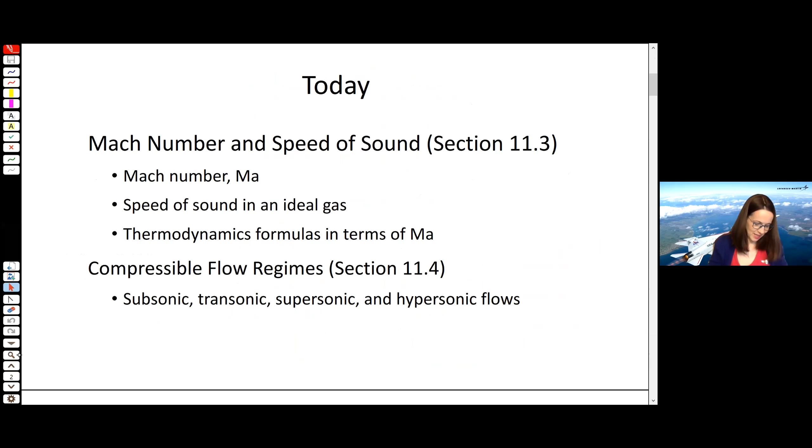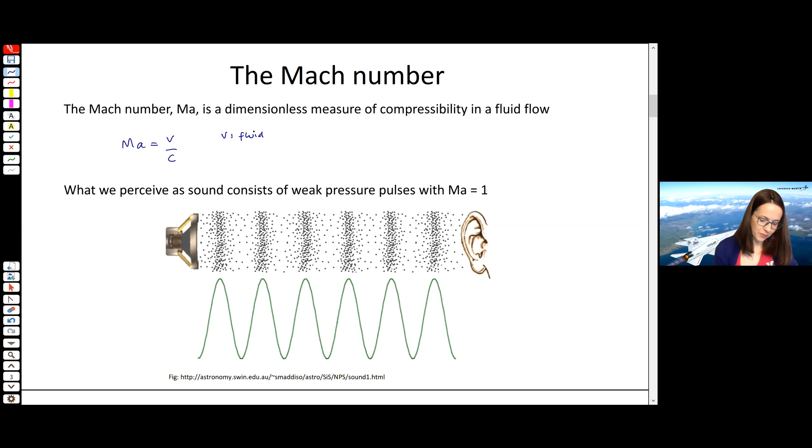All right, so the Mach number, I'm sure you've heard of it. It's sort of one of the fluid dynamics concepts that makes it out into popular culture. Mach number is simply defined as the ratio of the speed of the flow of a fluid over the speed of sound in that same fluid. We're going to be deriving an expression for the speed of sound in an ideal gas today.

And there's a rule of thumb, like we have these different rules of thumb for Reynolds number and when a flow is turbulent. We have a rule of thumb for when a flow can be considered compressible or incompressible. So it turns out that if your Mach number is less than about 0.3, you can consider the flow to be incompressible. So let me write that with a wiggly equals here. And then if your Mach number goes above 0.3, you have to start worrying about compressibility effects.

So when we're thinking about this, if we think about phenomena like sonic booms, hypersonic versus subsonic flow, it all has to do with sound waves in air, right? So what we perceive as sound is just these weak pressure pulses as depicted in the figure here. You can see that they're longitudinal waves, right?

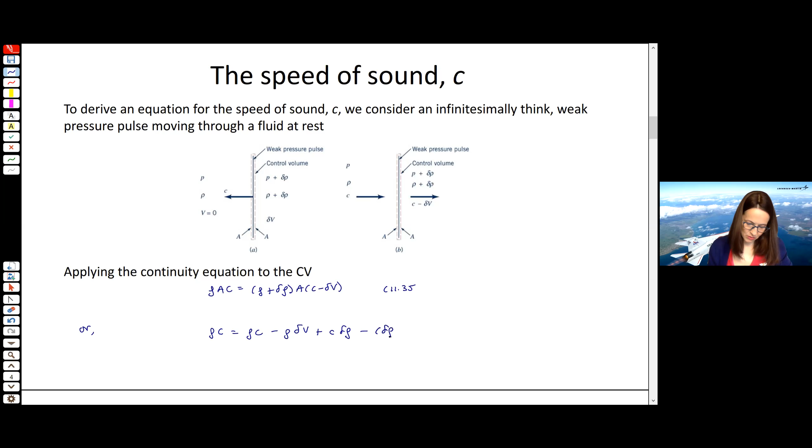So applying the continuity equation, we have rho A c on the left equals rho plus delta rho, A, c minus delta V on the right. This is equation 11.35 in the textbook. Or rearranging this, we've got rho c equals rho c minus rho delta V plus c delta rho minus delta rho delta V.

And you can probably guess where this is going, right? We've got delta times delta, this higher order term here, and we are indeed going to say that it's negligible in magnitude compared to the other terms. All right, and we do that, and we've got now rho delta V equals c delta rho.

All right. My PDF annotator just quit on me again. I really want to teach this class today. I am going to try this one more time and cross my fingers, although I'm not hopeful. Just give me one moment to try this again. And if it doesn't work for us, then I will have to record this class and upload it, but I hope it doesn't come to that. If it does come to that, bear with me because I want to show you a video about sonic boom before we go.

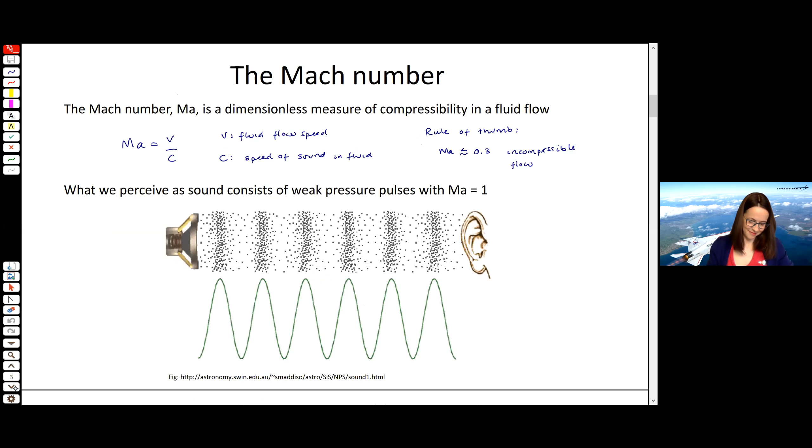Come on, annotator, I know you can do it. You got this. Okay.

So we neglect the higher order term. We end up with rho dV equals C d rho. This is equation 11.37. We've applied conservation of mass. Now let's apply conservation of linear momentum.

We get minus C rho CA plus (C minus dV) times (rho plus d rho) times (C minus dV) A. So those terms I just wrote down are the flux of momentum through the control surface. And now on the right, we've got the sum of the forces acting on the control surface.

We've got the pressure force acting on the left, and we're subtracting from it now the pressure force acting on the right of the control surface. All right, so we're neglecting friction forces in that expression, right? As you can see, we only wrote down pressure forces on the right-hand side.

If we now neglect those higher order terms, we end up with minus C rho CA plus (C minus delta V) rho AC equals minus delta P A. Or rearranging, we've got rho delta V equals delta P over C. This is equation 11.39, and here we're combining 35 and 38.

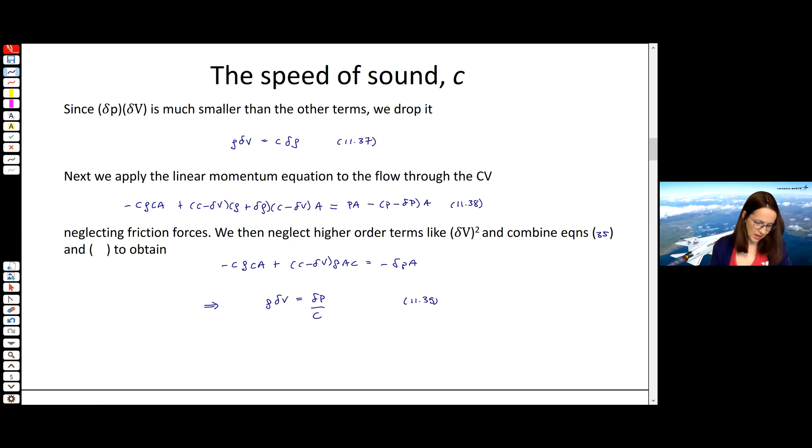All right, and then from 37 and 39, we get C squared is delta P over delta rho, or rearranging, we have our expression for the speed of sound: the square root of delta P over delta rho. This is 11.40.

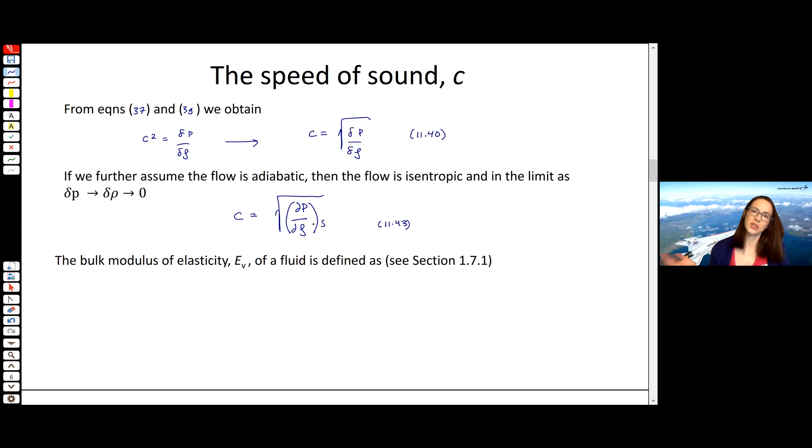If we now assume that the flow is adiabatic, there's no heat transfer in. Since we're already talking about a frictionless flow of an ideal gas, the flow is isentropic. And then in the limit, as delta P, delta rho go to 0, we get the following expression. Right, so what's different here is that the deltas change to partial derivatives. And the subscript S here means that the differentiation is occurring with the entropy being held constant.

All right, now if you remember the bulk modulus from chapter 1, it's a measure of compressibility in any fluid. Doesn't matter if it's a gas or a liquid. And it's defined in the following way. It's dP over d rho over rho, or rewriting that, it's rho times partial P over partial rho with constant entropy. All right, so in general, we have the following expression, if we use 43 and 44.

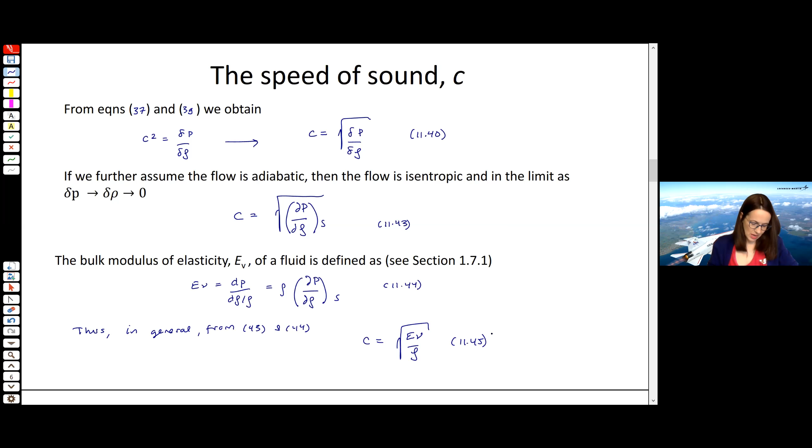And the physical reason behind that is that the higher the temperature, the more the particles making up the fluid are bouncing around and colliding with each other. And so any signal is passed through the fluid faster. But it's really interesting to note, maybe a little counterintuitively, the speed of sound through water is much higher than the speed of sound through air.

It's kind of funny, if you've ever been underwater in a pool and somebody talks, you can hear sounds, but they sound like they're really slowed down. They're actually much faster. And that makes sense from a physics perspective, right? Because water molecules are much more densely packed than air molecules. So if you have a really small intermolecular distance, you can easily collide with molecules next to you and pass along a pressure wave or a pressure signal. When the molecules are farther apart, like they are in a gas, the pressure signal travels slower.

All right, last time we derived the following expression for an isentropic flow of an ideal gas. It was that P is a constant times rho to the K power, where K is the ratio of specific heats, Cp over Cv. And if you remember, for air, K is 1.4. So we can express our partial derivative like this. It's some constant times K.

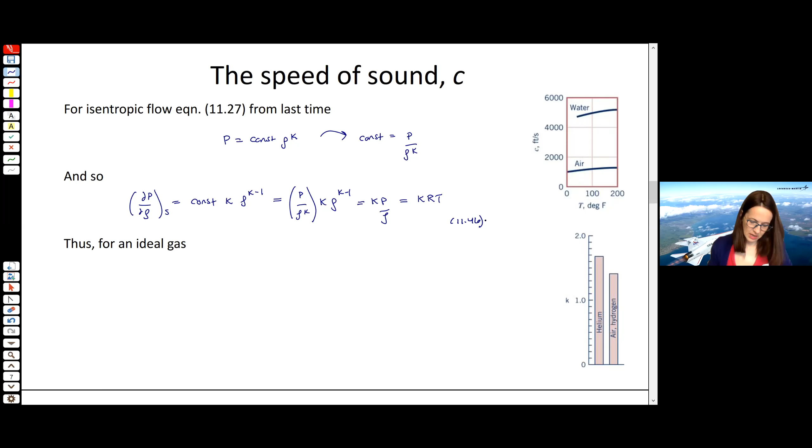Let me actually do one more step of this so it becomes a little clearer, right? So this simplifies to K P over rho, but then by the ideal gas law, this is K RT. Right? So for an ideal gas, the speed of sound is the square root of K RT. This is super important. We're going to box this in red. Equation 11.47. All right.

So another thing to note, if you look at the figure on the bottom right here, this is the value of K, that ratio of specific heats for a couple different ideal gases. So air and hydrogen have approximately the same value of K, but then helium has that higher K value. So that explains the helium balloon effect, right? If you look at the speed of sound in a gas, it increases with increasing K. So helium has a higher K value.

So when you take helium into your lungs, which you shouldn't do, it's dangerous. But when you take helium into your lungs and then speak, that's why it's so hilarious, right? It sounds sped up, and it in fact is. The sound is traveling faster to your ear when helium is the medium it's traveling through rather than air.

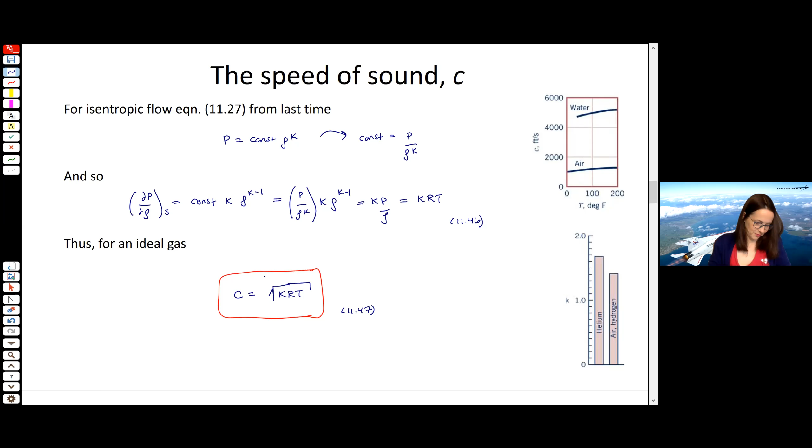All right, we can also rewrite our thermodynamics formulas in terms of the Mach number. So if we take our Mach number and square it, it gives us just V over C squared, right? But we just wrote down an expression for C for an ideal gas. So this becomes V squared over K RT, following the expression we wrote down on the end of the last page. Now, using the ideal gas law, we get rho V squared over K P, just plugging in the ideal gas law there. This is equation 11.48 in your textbook.

We can now take that and substitute this expression into those ratios that we derived last time. If you remember, we derived the ratio of the stagnation to static pressure, temperature, and density, right? Our thermodynamic quantities. And they weren't in terms of the Mach number, they were in terms of velocity and the specific heat, C sub P, right? Well, we can actually replace that term and rewrite those equations using this expression here, and we get the following.

So our ratio of stagnation temperature to static temperature for an isentropic flow of an ideal gas is 1 plus k minus 1 over 2 times the Mach number squared. And this is 11.50. We have a very similar relationship for the ratio of the stagnation to static pressure. And it is 1 plus k minus 1 over 2 times the Mach number squared, but now raised to the k over k minus 1 power. This is equation 11.51 in your textbook.

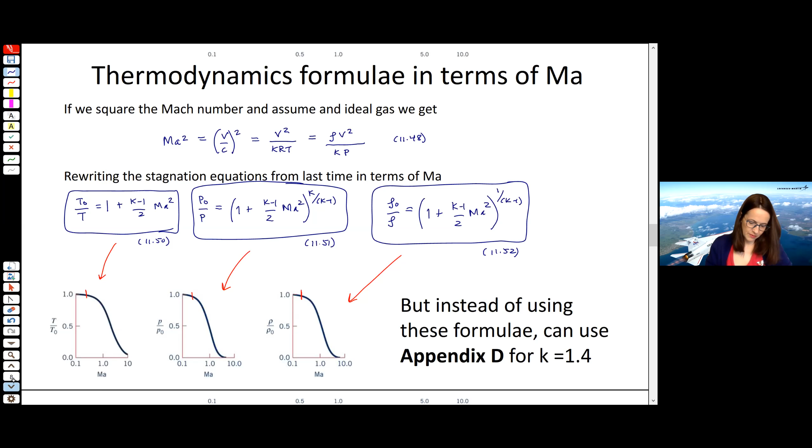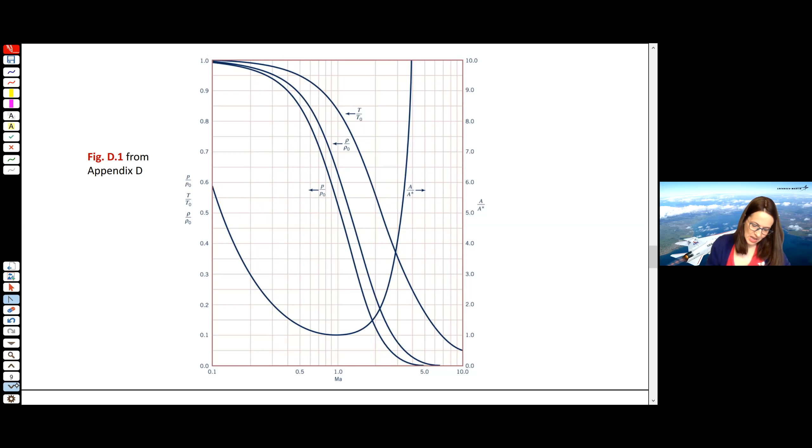So if you're given a Mach number, say it's Mach 1, you just trace it up to the appropriate curve for whatever quantity you're looking for, see where it intersects, and then trace that back to the vertical axis. Okay, so that's how you use that. If you want to be more precise numerically, you might want to use table D1 instead, which is the next item in appendix D. It's got the Mach number in the first column, and then the ratio of static to stagnation temperature, pressure, and density in the next three columns.

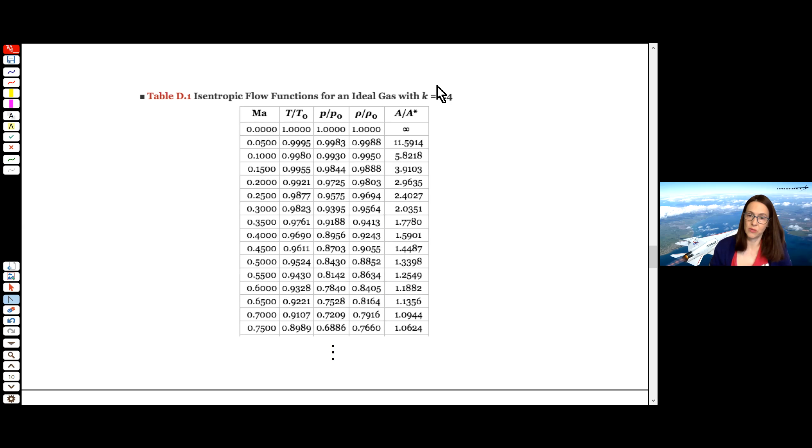The thing here is it's not continuous, right? So if you're given a Mach number that falls somewhere in between these values, you can either not be terribly precise and pick the nearest value, or if you want to be more precise, you can use linear interpolation. Again, keep in mind this is for K equals 1.4, so air, or maybe a problem would say an ideal gas with K equals 1.4, without specifying that it's air.

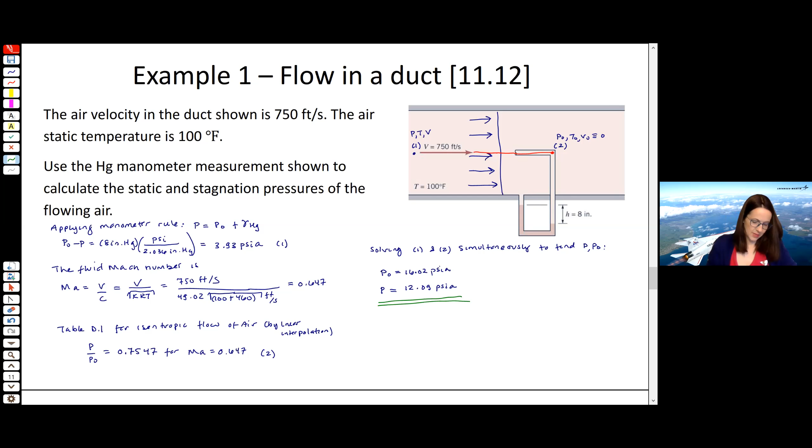So here we see we've got a stagnation pressure inside our pitot tube, and it's higher than our static pressure. And that's exactly what we expect, right? So by the Bernoulli equation, we expect that if the velocity is decreased, brought to zero, we're going to see an increase in the pressure. And those trends hold for compressible flows as well, at least subsonic compressible flows.

But for external flows, we calculate the drag force on an object, F sub D, by using the dynamic pressure times the area times something called a drag coefficient. So basically, if you've got air flowing with speed V, and you've got something with a projected frontal area of A, how much drag force that object experiences depends on its drag coefficient. And the coefficient changes a lot with the shape, right? Whether it's a circular cylinder, a sphere, a cube. In general, the smoother and more aerodynamic an object is, the lower the drag coefficient that it has.

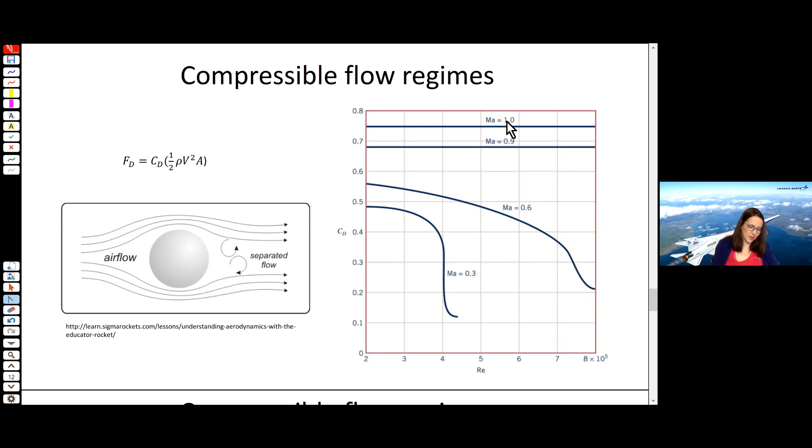All right, last slide here before we hopefully will have time for a movie. If not, you can watch it on your own. Movie about sort of sonic booms that relates to the aircraft, the NASA aircraft, Lockheed Martin aircraft I've got behind me.

All right, so now I want you to imagine that you've got some object and it's traveling from right to left with some speed v. And it's emitting a sound once a second. So let's say a beep, right? And that sound is just moving away from the object in a circular wave with a constant speed. So here, if our object's speed v is 0, the object just sits there. The object is denoted by this red star, this red asterisk. It just sits there, and these sound waves just move away from it in a symmetric way.

Here's this larger diameter wave is the one that was made 3 seconds ago. This next smallest one, right, here's 2 seconds ago.

All right. So annotator just quit on us again. But hopefully you've got the slides open in front of you. Let me try one more time restarting it because this is annoying. I, of course, lost all my annotations I did because I was afraid to hit save because that seemed to be crashing it before. Ooh, it's letting me restore it. How generous. Oh, wonderful. Kept all the annotations. Hallelujah. Okay, here we are. Wonderful. Thanks for bearing with me. Okay, so here, our object, denoted by the red asterisks, is not moving, and these sound waves are moving out. The largest radius one. Oh, I'm not sharing. Sorry about that. Hold on. Screen share. You can do it. Yes. Okay. Everybody see that? Good.

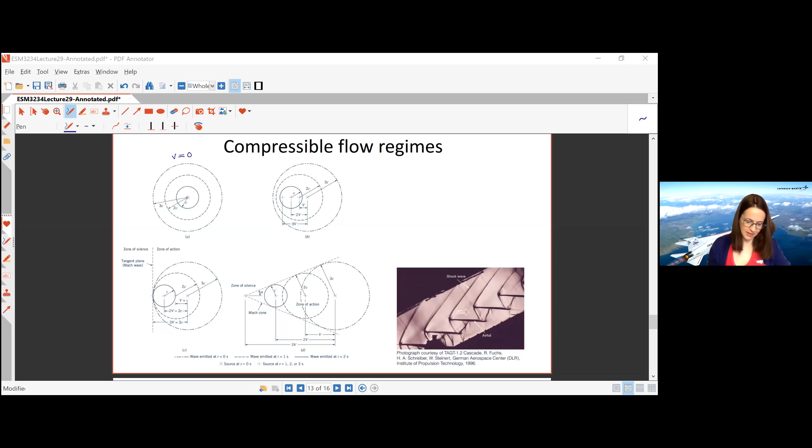Okay, V equals 0. Largest circle here was a sound wave emitted 3 seconds ago. 2 seconds ago was the next largest, and then this one was emitted 1 second ago, right? Here, we've got some non-zero velocity, but it's still lower than the speed of sound in air, okay? Or if you're imagining the analogy of ripples on the surface of the water, then that would be the speed of the water waves on the surface of the water, right?

So here, the object is moving to the left as it's emitting these sounds. So they're sort of piling up near the front. We've got really close distances between the ridges of these sound waves. And in the back, they're getting farther and farther apart. These are both subsonic cases.

Here we get to our critical sonic case, where our Mach number is equal to 1, right? Because V is equal to C. And we get to the point where these waves, the peaks, come and they meet and they pile up at the same location. And this is the phenomenon that leads to a shock wave. When you get a bunch of sound waves piling up at the same location, in perfect analogy to our hydraulic jump when we were looking at channel flow and the Froude number being critical and those surface waves piling up at the same location. Here, we've got these sound waves piling up at the same location.

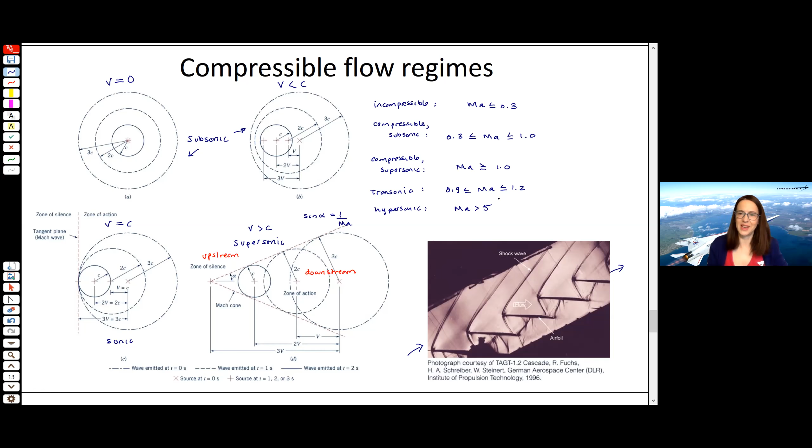And let me just take a moment now to talk about the aircraft behind me in my background here. It's a Lockheed Martin X-59 QueSST aircraft, quiet supersonic technology, and it's part of NASA's low boom project where they want to achieve supersonic flight, but without the really disturbing sonic boom that people complain about, right? And one thing that I want you to notice is that the wings are swept backwards. Aircraft that are designed to fly supersonically have to have wings that are swept back.

And the reason is this Mach cone, this cone of silence here, right? So if you've got an aircraft body here, if you have a standard aircraft with wings like this, they will go through the shock wave and cause lots of damage, right? And it'll be hard to achieve the kind of flow that you want. So aircraft that are designed to fly supersonically have swept back wings, like the one that we see here, so that they can stay inside that Mach cone.